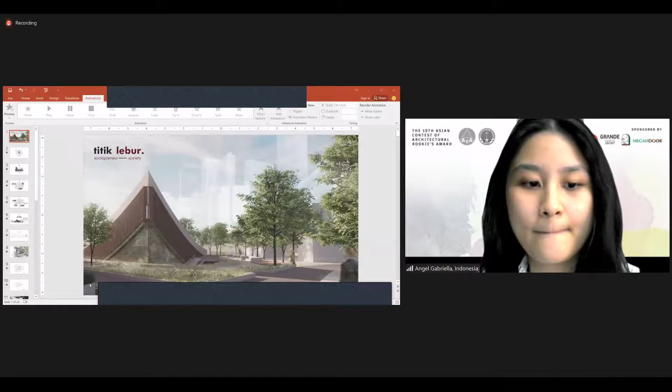Greetings everyone, I'm Angel Gabriella from Petra Christian University, Indonesia. Thank you for the opportunity to present my project, Titik Lebur. Titik Lebur has the closest meaning to unity or becoming one. The design brief was to make a symbolic youth center on Apsari Street, Surabaya.

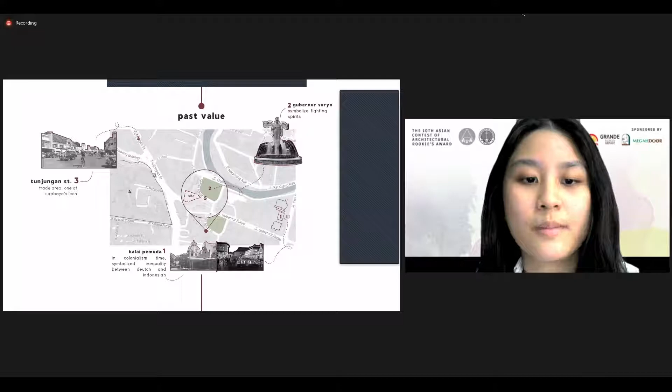The site is located in the center of Surabaya in the business district. Surabaya is known as the city of heroes with a lot of historical values. The design process started from issues and past values around the site. First, there is Balai Pemuda that used to symbolize inequality, and second, there is Apsari Park and the statue of Gubernur Suryo, which symbolizes the fighting spirits of Surabaya. Third is Tunjungan Street, one of Surabaya's icons as the oldest trade center.

Presently, small businesses like old street shops and street vendors around the site are beginning to be extinct due to the development of technology and modern shopping centers. Looking at how fast technologies have developed, the future of these small businesses are questioned. Not only that, but values such as egalitarianism and solidarity begin to fade and are replaced with individualism.

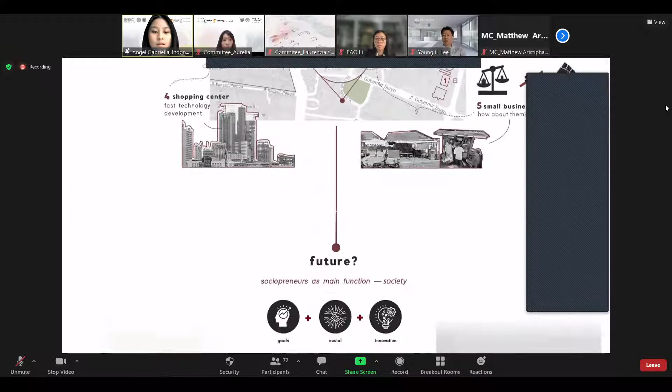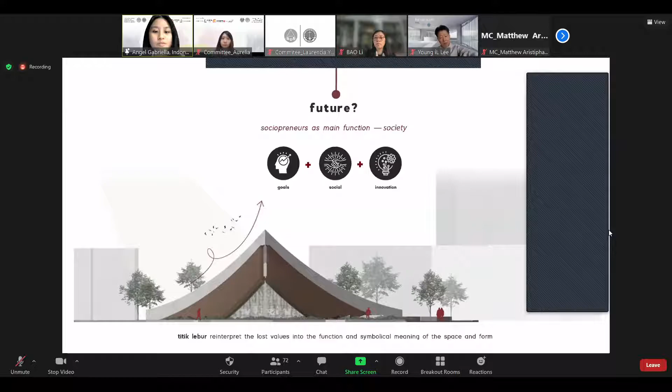That leads to social economy inequality. Therefore, Titik Lebur wants to empower youth to become sociopreneurs and connect them with society by reinterpreting lost values such as fighting spirits, unity, and equality into the symbolic meaning of the building.

Third, the ground is sunken to give a humble impression and blend the building with the surrounding. Fourth, subtraction is used to create skylight and outer space. And lastly, communal space for the street vendors is created to give linkage between the site and Taman Apsari.

The second entrance is through the back door, mostly used by sociopreneurs so they can go straight to their working space. There are also a lounge and outdoor area that are used for break time and create a social space.

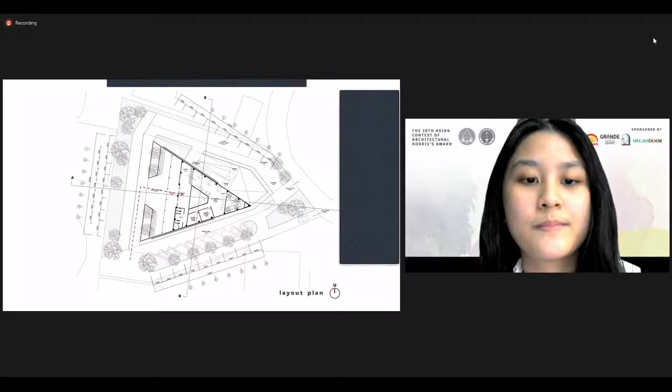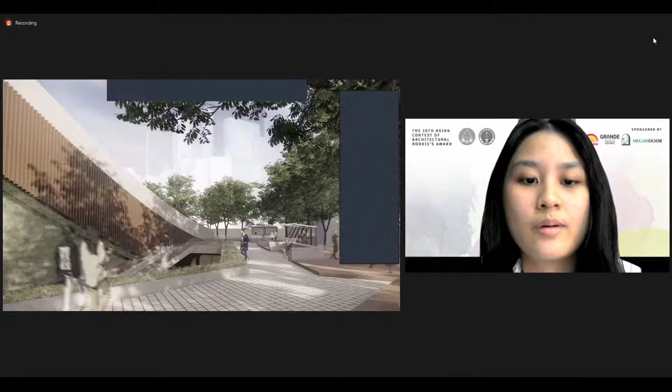Moving on to the vista, on entrance visitors are welcomed by the vista of Tunjungan Plaza as the building's background, symbolizing today's inequality, whereas the building represents the future, or equality. Before entering, visitors go through the ramp to give the impression of a long journey before reaching a goal. Murals on the side walls serve as a reminder of unity.

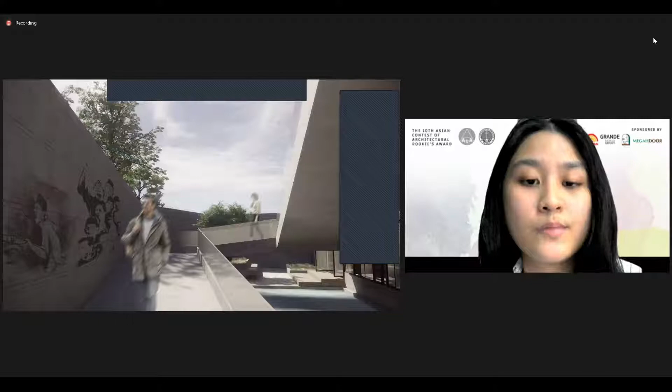The visitors then enter the amphitheater where sociopreneurs and small businesses work. The ceiling is made lower so it can create a more intimate feel and emphasize the space. The skylight above the amphitheater attracts people to look up.

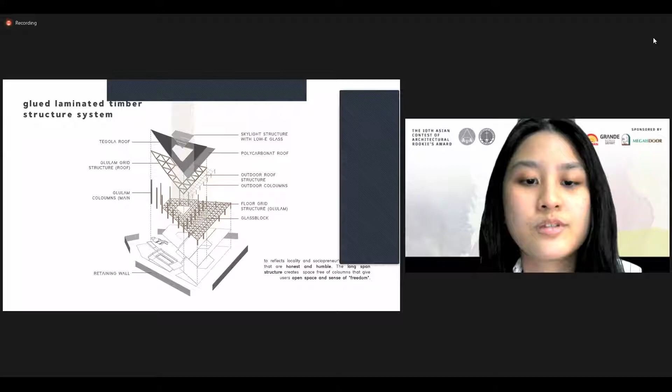The structure is made from glulam and is exposed to reflect locality and the sociopreneur's characteristic of being honest and humble. Open space is created through the structure and the minimum of walls so that it can increase social interaction. Low-E coating glass is used to give a transparent look and welcome users into the building.

Sliding glass allows natural ventilation, and vegetation is used to reduce the heat caused by the glass and blend the building with the outside. Timber shading is also used to emphasize the curvy shape.

This is the section. From section A, you can see the glass block and the skylight. And section B shows the response to collect rain and avoid flood, lowering the temperature in the basement.

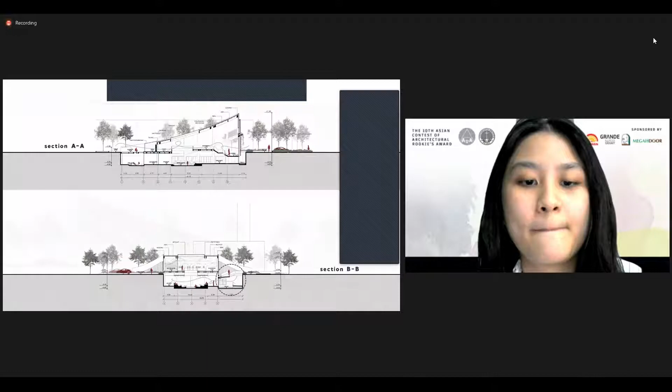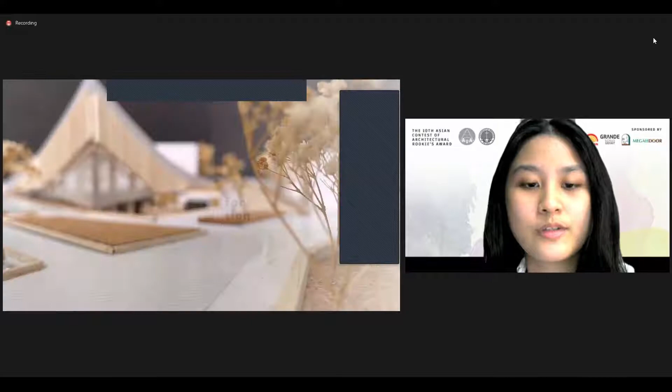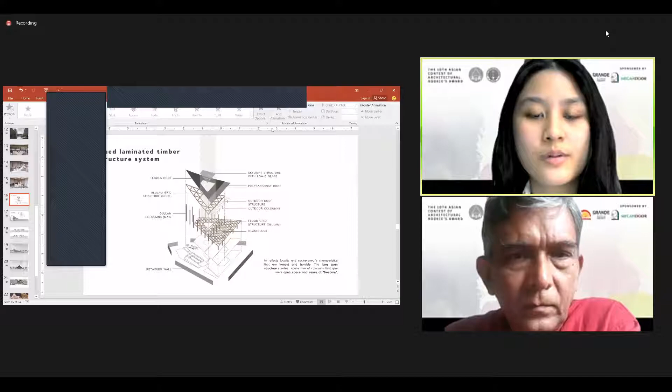Angel, can you explain the roof structure, please? The roof structure is made from glued laminated timber. I used a structural grid for the roof so it can give a long span structure, and also I used the floor with the structural grid to give a long span structure. So the space inside is more free, more open. With that, I want to create more social interaction between them.

So the same triangular grid is on the floor for the horizontal roof and horizontal floor. The structural grid is used for both the roof and the floor. So the basement is also an open plan without that much columns.

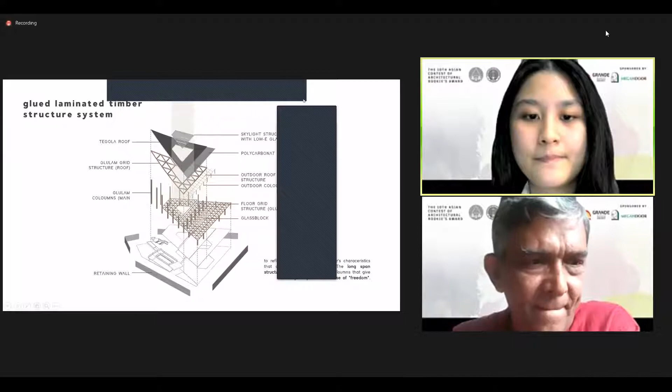Thank you for your presentation. I think it's architecturally well planned and the construction is very easy to understand, very simple. But like the other participants, you use the symmetry plan, very very strong and symbolic in the exterior view. We think that when you use symmetry, there will be another effect of the axis or centrality or something.

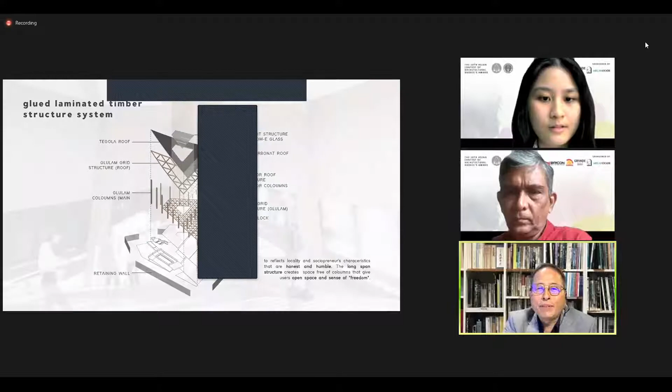So do you have any stronger intention to use this symmetry on your site? On your axis, is there anything on the axis, or is there a special meaning for your shape? Okay, wait a minute.

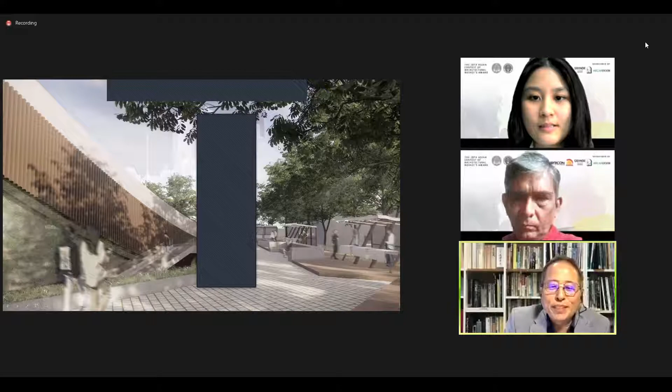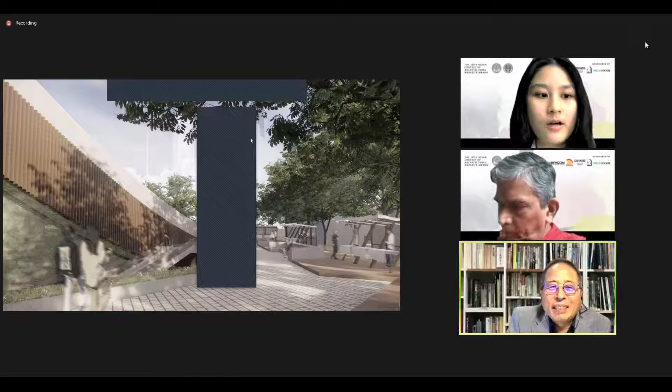So yeah, I want to create a vista towards that building. So buildings are for you an important factor in the central city. And how about the other side? Anything? Also, on the other side, there is the Taman Apsari, or Apsari Park.

This is the Apsari Park. There are usually a lot of youth who spend their time in the park. So I want the building to have an open impression from the park, so it can invite those youth to come to the building.

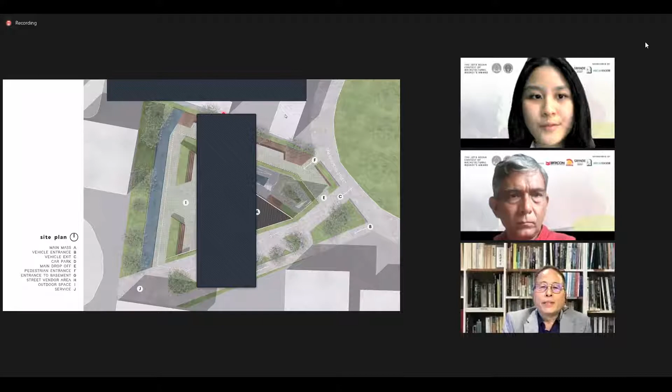I'm sorry for interrupting, Angel, but I think we see a black box in the middle of your presentation. I think it's your Zoom that's blocking it. Yes, oh I think it's better now. Better for the judges as well.

Yes, so this is the Apsari Park here, and the building is actually looking towards the park, so that it can invite people.

So we can see you have a good idea of fitting your building into the site form. But be a bit careful about using symmetry. Symmetry means a very strong effect to the outside. Okay, thank you.

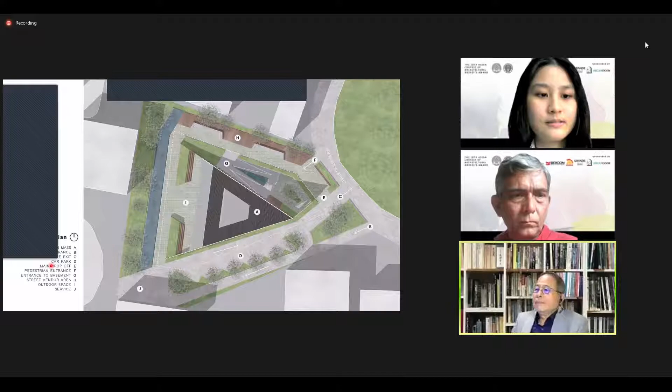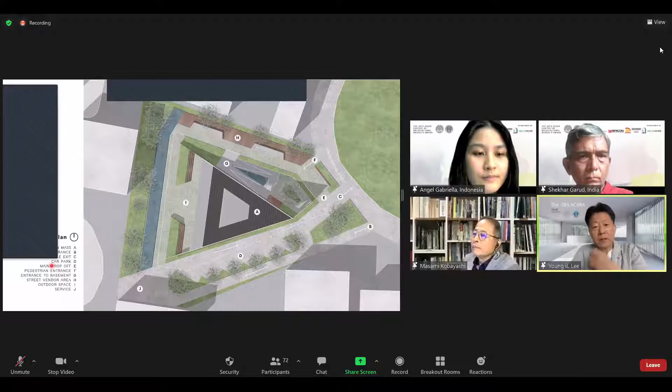My question is related to Professor Kobayashi. Looking at the assignment in your university, it is to make a symbolic youth center. So how did you understand the symbolic youth center, and how did you express it in your plan? Is it through symmetry?

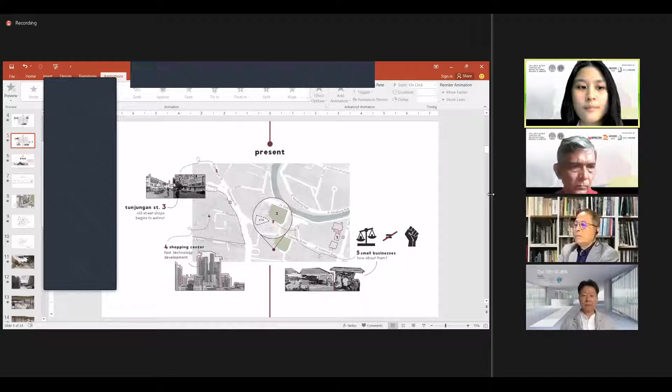For the symbolic meaning, I want to reinterpret the old values, the past values, such as this fighting spirit, and also this social inequality. I want to empower the youth to be more humble and to bring back those lost values into the building by making a symbolic building.

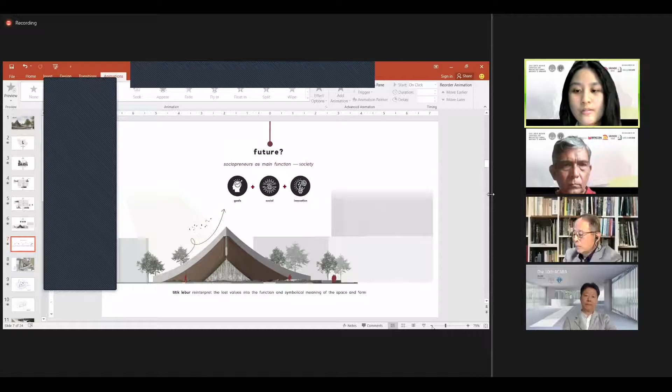So the first symbolic meaning is from the form. The form is made like an undulating form to create a meaning. In this form transformation, I explained a little bit about the symbolic meaning - the form actually makes a curved form and points to one point.

This is actually representing how a sociopreneur goes from zero to hero, and also to remind them how Surabaya used to fight colonialism. I also want to give this humble impression or feeling from the building, to remind them to always be humble, and to blend the society and the sociopreneurs.

Does that answer the question? Okay, okay.

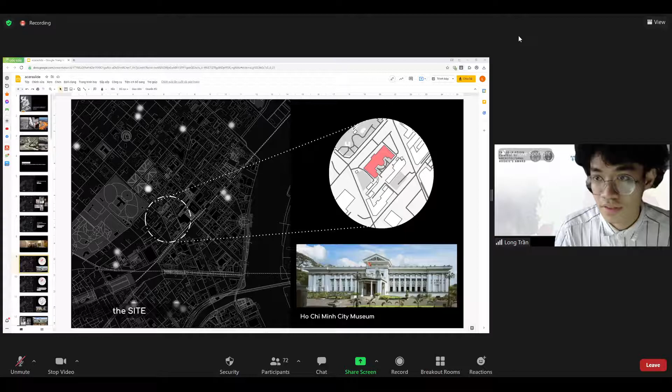All right, we can already see the screen. You can start the presentation. Hello everyone, do you hear me? Yes, yes, okay. My screen, is that normal? Okay.

Hello everyone, I'm Long Tran from Ho Chi Minh University of Architecture. You can call me Long, that means dragon in Vietnamese. Now let me start my presentation.

Saigon, 300 years ago, the flood built up the fertile land. The current brought ships from far away, from China, to explore and develop the land. So the currents created the typical traditions and culture of Saigon.

Could you zoom in a bit so we can see the full slide? There's parts cut off. I'm sorry. Seems some parts of your slides are cut off. I think just show, or you want to focus on some areas. Area. So go ahead.

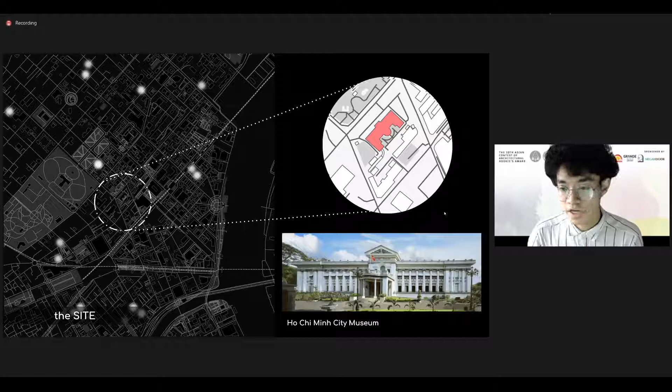I found that the Gia Long Palace of Old Saigon is also a city museum today, a place to display artifacts about the development history of Saigon. But the values of the previous era were barren, isolated, and found no common language with the young public.

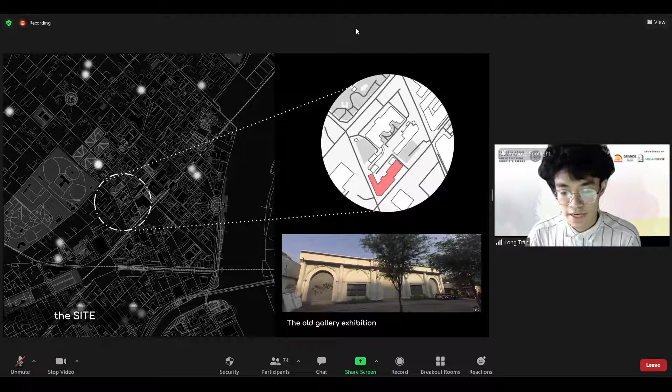Their campus was used as a city gallery, which did not meet the taste of young artists. So I have questions: could old and new values coexist in the same era?

My idea is to create a space in the city museum campus as a bridge between traditional and modern values. I realize inheritance is a sign of suitable development.

The first bridge of contemporary art, of new experimentation, is always placed next to the values of the previous era. They do not negate each other, but follow each other like the current. The stronger the connection, the stronger the currents become.

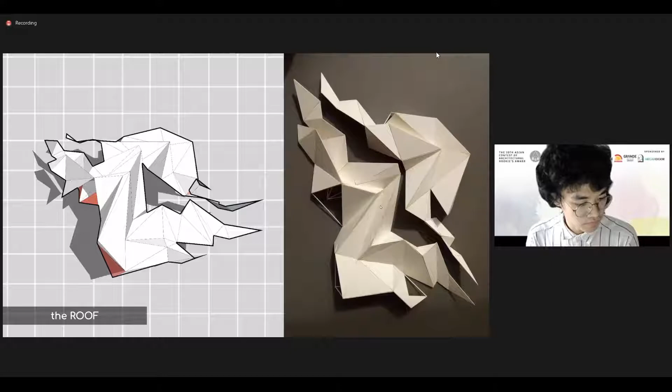Now we get to the roof. The two-layer roof design has minimized outside noise impact on the building. Besides, the roof layers fold up and down, overlapping each other, making the building still ensure the amount of natural light entering. Light received is mainly scattered light because it has passed through the roof layers, so light intensity and radiation are significantly reduced, especially in a country with significant sunshine like Vietnam.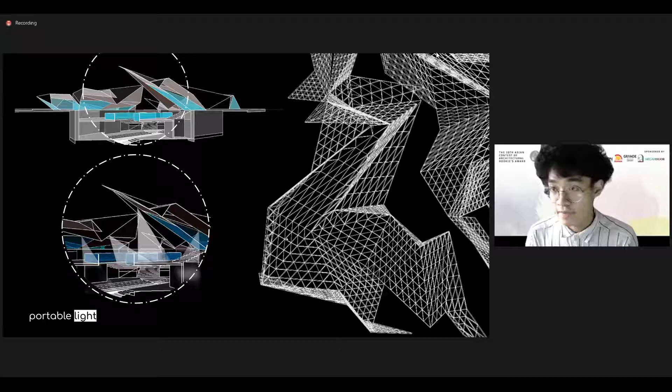I could change the interior roof finish to mirror, and we would have a mirror house. Then the roof of the building seems to disappear, leaving the work and the space its reflection. We can completely experiment and change the material depending on the idea and content of the work on display, so that the work can be included in the work itself, not just as background.

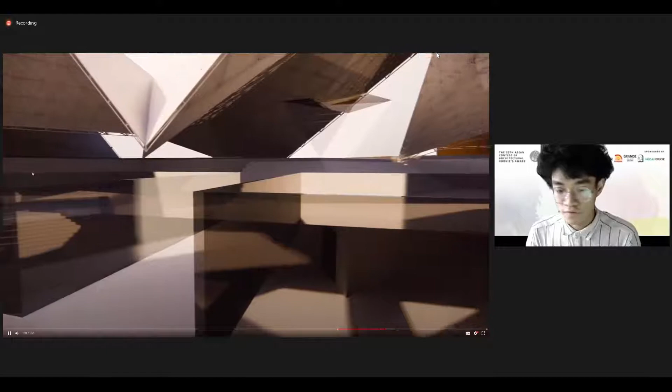Now we get to the B1 floor plan. The folded roof becomes a background for sculpture. The walls will be immersed in the undulating waves of the roof, sometimes hidden and present, changing continuously with the footsteps of the observer.

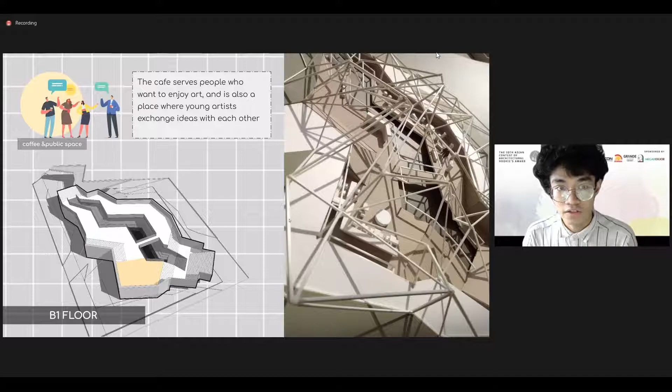So this is the entrance - a reception hall, the entrance to the building. The cafe serves people who want to enjoy art, and it is also a place where young artists exchange ideas with each other. The display is for visual art, like sculpture exhibitions. In some pictures, the space itself is a work of art.

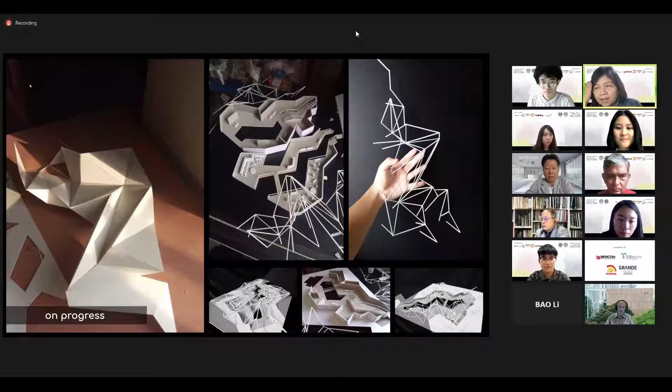Okay, thank you for your questions. Give me some minutes. Okay.

So it's a metaphor in your idea. Okay, do you have more questions for me? Yeah, the old values and the new values, how do I resolve that? I resolve that.

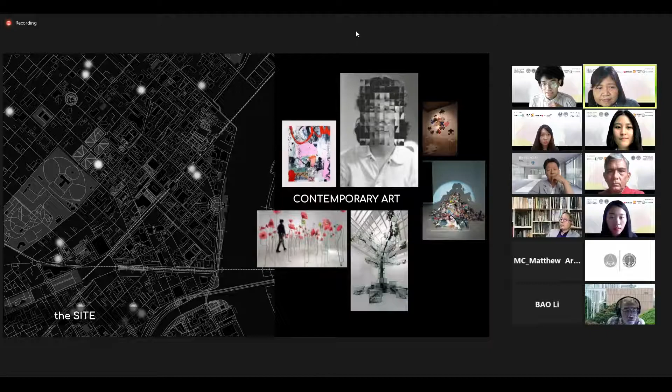My work is on the site of the museum. It's like a flow underground and on the site of the museum. So it attracts people more, to concern and trace about the old values like the museum. They can focus more on those old values when they come here.

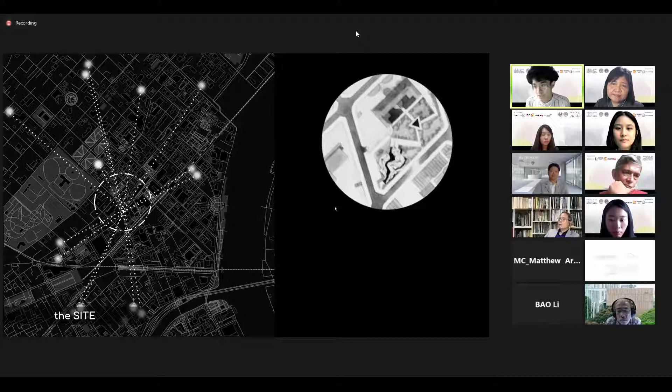So you made an infill design on the site of the museum. Yes. Okay so it is a kind of urban injection, like a landscape injection in front of the museum. So your design is the catalyst of the mix of old and new, is that what you mean? Yes, and most of that floor I make underground to respect the museum.

Okay. So the coexistence is between the design and the museum. Yes. Okay, thank you.

Could you please show, I think you have some more floor plans. We only saw the pencil drawing, but I think I've seen somewhere your presentation is a little difficult to follow because we always see fragments, I never see the full picture. Maybe that reflects you a little—very interesting, very beautiful, but it's like I always want to capture it and then it's gone, and then it moves.

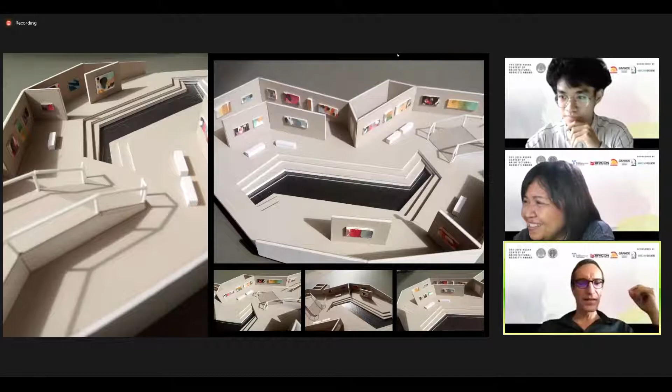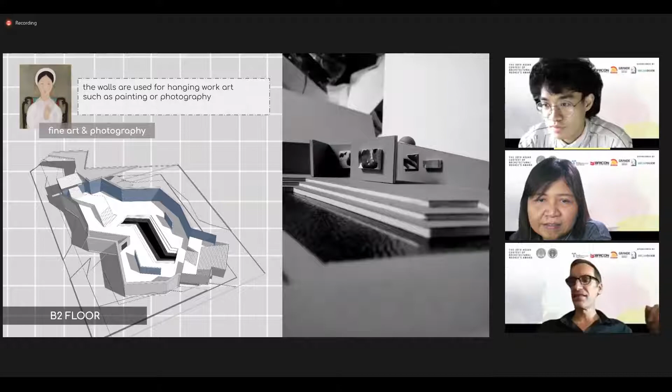But show me the floor plan, the floor plan you have somewhere. I saw it, the black drawn floor plans, 2D. The 2D plans, ground plan, no 3D, no sketch, just 2D, a real thing, 2-dimensional. The 2D ground plan, you have different levels I guess, but at least maybe just one, just the ground plan, floor plan.

That's B2 or B1. Wait a minute. Because it's important to see. I mean your total shape is very consistent, and I think it's nowadays already a traditional way to deal with heritage buildings, that you contrast with a totally different approach. You go underground, you go free shape, you don't try to compete at all.

So you're more like a piece of art sitting there in the park, or even digging into the park. I can understand that, but what I see here in this pencil drawing looks interesting, but you have somewhere on your board, I saw it, a proper floor plan of your whole exhibition. Can you show this? So that we see all the rooms you have in one, on the... no roof, floor plan.

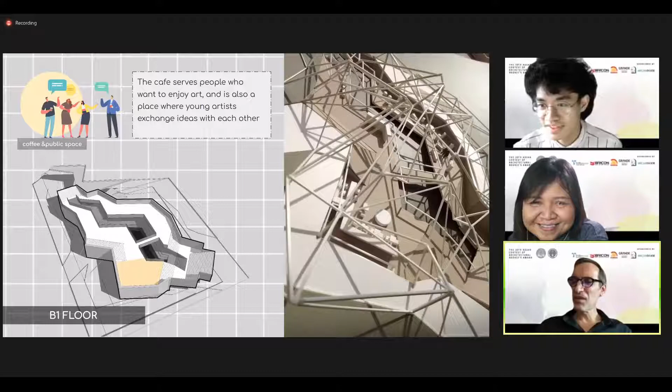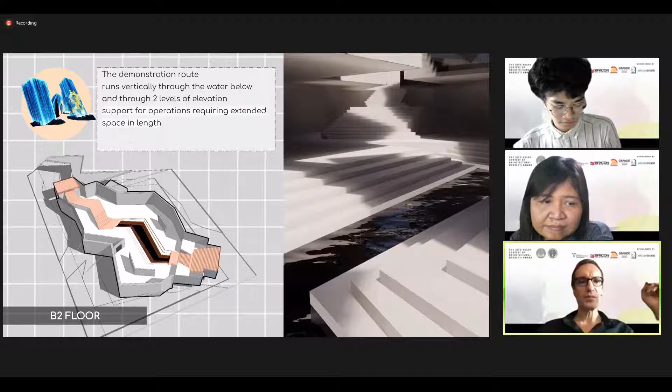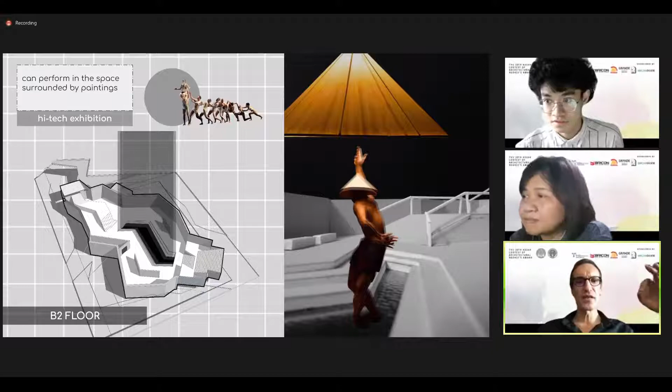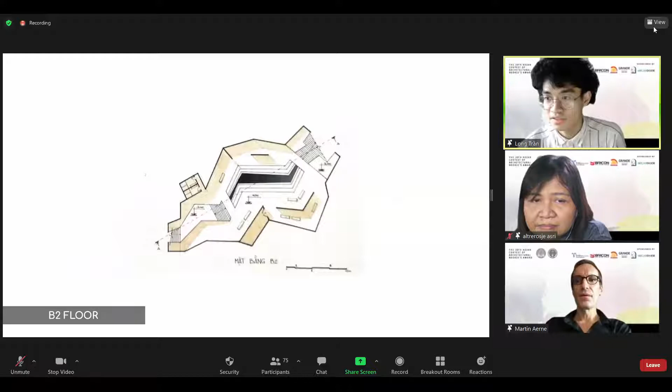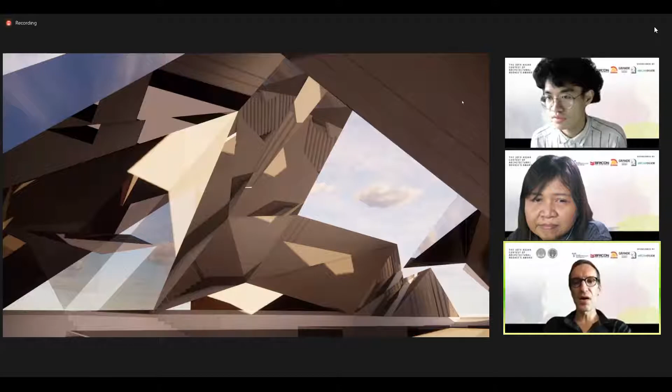I just have a plan for B2 floor and B1. Can you move it onto the screen so we see the full floor plan? I see here only a little part of it. The floor plan I have is my sketch, but not clearly drawn. I mean this is the master plan, the top view, that is good. Top view. But you have a floor plan on the ground of the whole exhibition. I saw it for a moment somewhere, but it comes in, it goes, and I never see the full picture.

But if you don't have it, then that's it. I think I can use my model to make you understand. No, not the model, just a floor plan, as we see. Again, your design is very consistent.

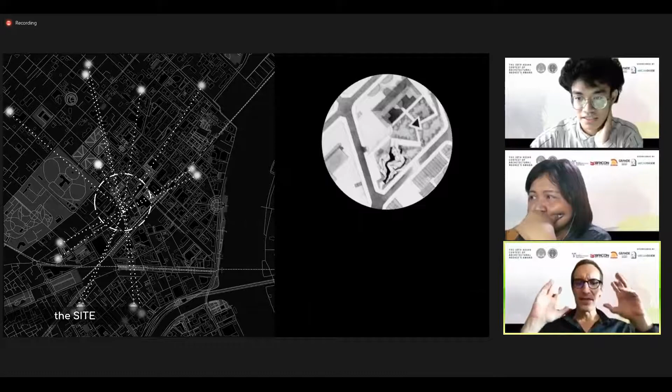You know what you want, and it flows through. But a floor plan would be important. That is the floor plan.

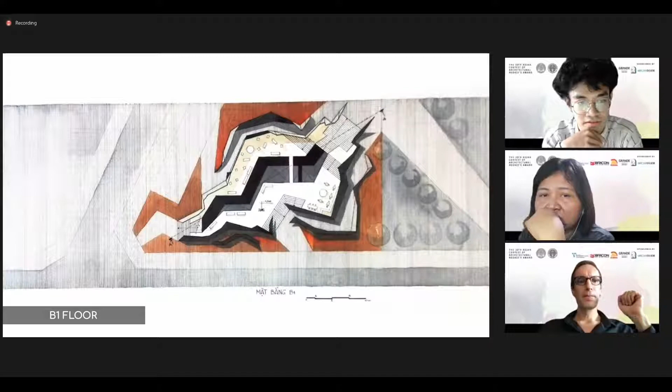It cut through the roof, so you can see something in there. Is this the one? Yes, but I only see part of it, the left side is cut off. I think there's a problem with your Zoom view because the committee can see the whole floor plan clearly. Oh okay, that seems to be the issue. Sorry for interrupting again. No, thank you for helping.

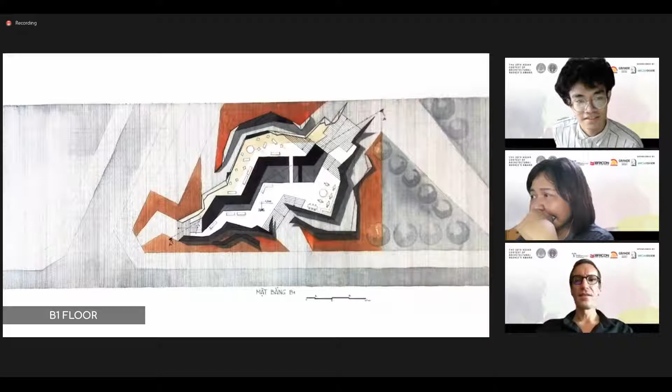I have a basic question. I didn't understand how you decided on the volume and their form. Imagine, in my way, maybe you adopted a form from the river shape.

That's not just the river. Okay, show me the slide of the Saigon River. My work can be shaped by the flow, the traffic. Yeah, okay, show me the slide of the Saigon River.

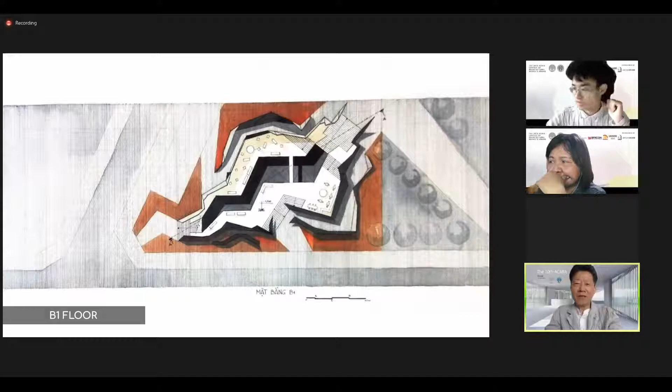Maybe. I don't understand how you decided the form, the roof form or something. The floor plan is also like a dragon, as in your name. I made the form based on pictures I saw of Saigon in the future and the past, so it gave me the feeling of a shape, my form.

So it's not just the rivers. Analyzing your work, I imagine, in my way, when you decided the volume and the form, you imagined two types of images. One is from the shape of the river, and the other is the Vietnamese alley, which is like a hand. So you mixed the alley and the river shape.

Is it right? Yes, but let me explain, it's not just the forms, it's also about the activity inside the building. It's not just the form, but we can understand what's happening inside. What kind of activities? All our activities are contemporary art, performing arts, and other activities.

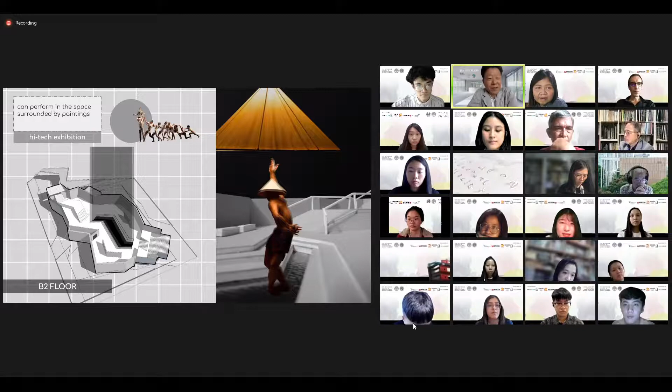Don't make excuses, it's your responsibility. But you can change and connect some space, it's not fixed, it's flexible. But I think it shows your creative sense of space. It is so nice, but the presentation is not good.

You know why? We didn't understand it perfectly. It was kind of hard to follow your presentation. I'm sorry. Okay, thank you, any more questions for me? It's always hard to follow the dragon, isn't it? Oh, thank you, yeah.

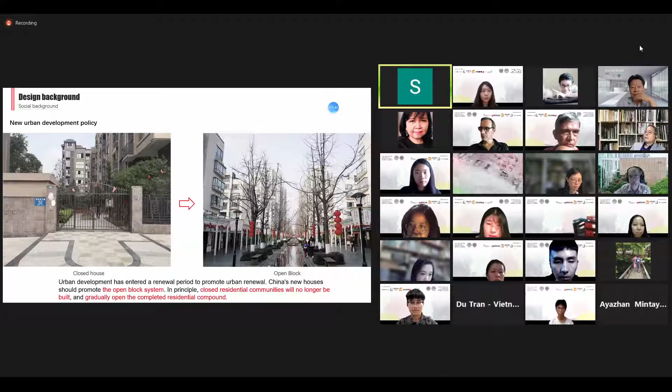At present, China is in a new stage of urban renewal and development. To promote this, we need to promote an open block system for communities. On the other hand, due to the 2020 epidemic outbreak, communities often use blue corrugated boards to achieve closure and isolation. This has become an effective means to deal with local epidemics, but it's not beautiful enough, and space utilization and efficiency are also low. Therefore, there is a contradiction between opening communities to activate the city and closing communities for isolation and prevention.

The site is located in Dingzigu Street, Hongqiao District, Tianjin, China. To its north is an urban trunk road and a university, and the other three sides face adjacent communities. Although there are many people and vehicles around the communities, the interior is still old and lacks vitality. Through investigation, I found several major problems. Question 1: how to change simple board isolation into a warmer material space with humanistic care?

Question 2: how should we update and enhance the old community to stimulate its vitality? Question 3: in the post-epidemic era, how should community public space adjust the opening and closing transformation so that the contradiction between community opening to activate the city and closing to isolate prevention can coexist harmoniously?

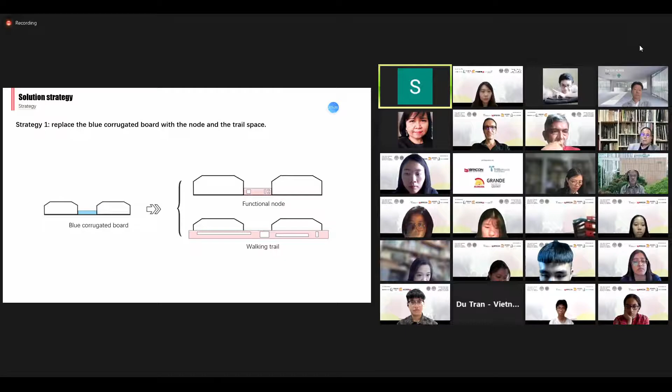Based on the above 3 questions, I propose 3 strategies to make an appropriate community opening and closing system. First, I replace the blue corrugated boards with the node and the trail space. Then I transform the internal vegetable market and other spaces, implant new functional buildings, and activate and improve each node. Finally, I use Chinese traditional garden techniques to improve the spiritual and functional attributes of the nodes and trails. Under the guidance of these 3 strategies, the block is generated.

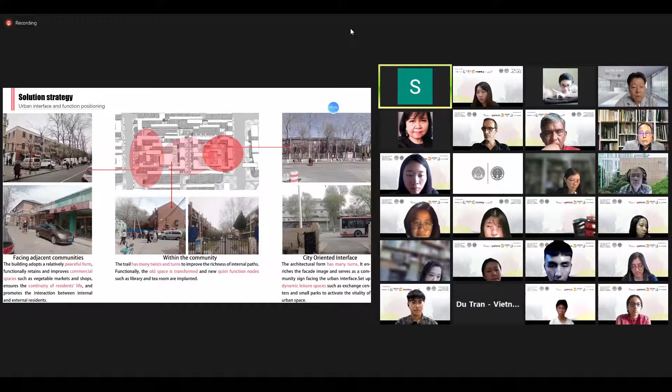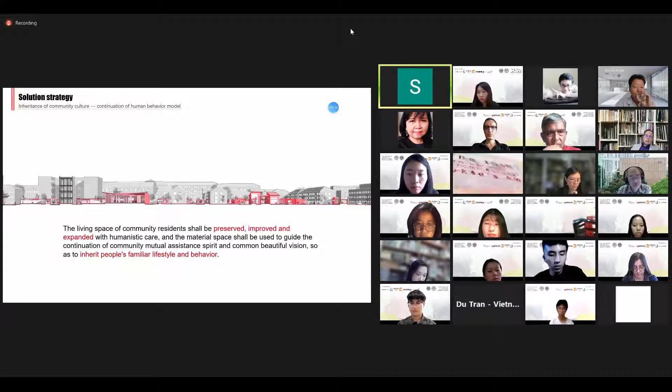Through investigation, the community is divided into 3 types of interfaces: internal community interface, surrounding community interface, and urban interface. Facing different interfaces, the architectural form transitions from peace to twists and turns, and the architectural function changes from quiet to dynamic and excitement, realizing response measures for different scheme, forms, and functions at different interfaces. This realizes humanistic care for the living space of community residents and inherits people's familiar lifestyle and behavior.

During the epidemic period, the nodes will be divided into 3 categories: traffic, prevention, and management. The mode transformation of community opening, semi-opening, and closing will be achieved through the adjustment of the opening and closing number of the 4 main entrance nodes.

The last part is a display of the scheme. First, we can see that the red part is the new addition and reconstruction part. The new scheme finally forms the overall scheme by combining the traffic system and the designing and transforming of the node and the trail.

The second part is a display of the explosion diagram and the local scheme. I echo the tortuous path of Chinese traditional gardens, promoting people to perceive nature and feel the open environmental atmosphere of the unity of heaven and man in a relatively closed space.

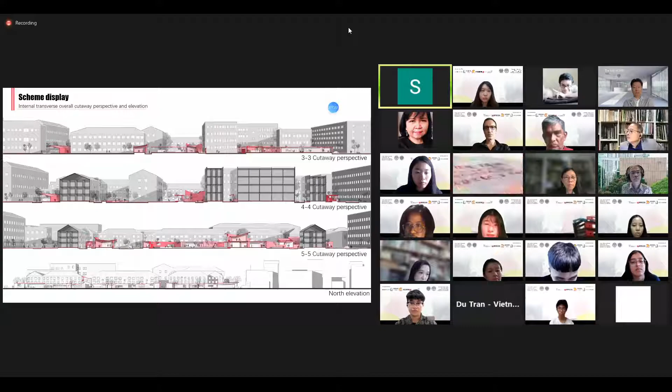The third is the plan and analysis of the scheme. I emphasized its relaxed spatial rhythm in the overall perspective and completed the high integration of man-made and nature, so that residents can feel the open and natural space atmosphere like Chinese gardens in the community.

The fourth is the conversion comparison of important node space between old and new. Compared with previous works, the entries improve functional diversity and space utilization, and realize the adjustment of community opening and closing degree by closing different numbers of entrances.

Transform the vegetable market into a community control center and supply materials point. The interaction center in the park has become an isolation point so that residents can quickly seek medical treatment in a familiar, green, and healthy environment. The last is the model display and the video display.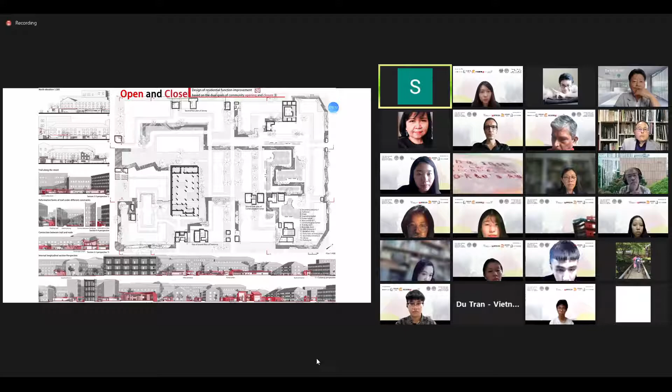All right, are you done, Yang Suli, with the presentation? Okay, what does it do?

That's my presentation. Thank you for listening. Okay, thank you very much. Now let's move on to the Q&A session.

Okay, Yang, right? Yang, see. Yes.

I can see you've done a good job here, and your presentation is very clear. You use traditional garden techniques to improve the functional attributes of nodes and trails. But when implementing the nodes and trail series, I think you should not only consider vehicle or pedestrian streamlines, but also think about bicycle streamline, which is a very important condition in the neighborhood. Also, don't forget what you want to connect: who are the real users in this community—the store owners, the residents, or the visitors—and there should be a timeline involved.

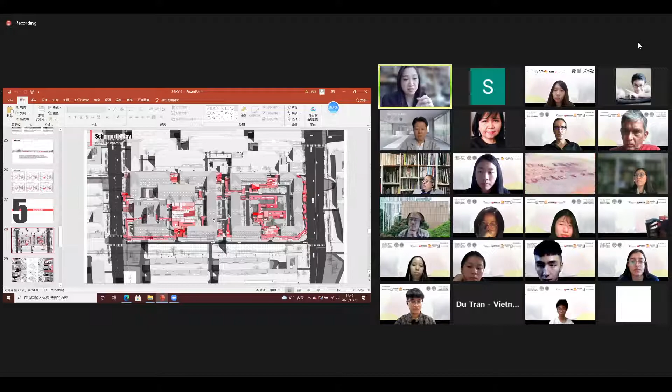For example, the conditions of your open and closed community proposal will be different in daytime and nighttime for sure. Also, during holiday seasons or weekdays and weekends, the opening and closing of the communities should not only adjust according to epidemic degrees, but could also be adjusted according to different times of the year, because the crowd conditions and the users will be different. So I think maybe you can share a little bit more about this.

Have you ever considered what would happen—like maybe during the weekend, the users might change to parents or lovers or different kinds of people coming into your community, more like tourists? What are you going to react to it, and how would this closing and opening community system respond? Please share your idea.

Actually, its circulation is flexible, and people rely on the twist and flexible architecture form, space, and path. Their circulation is also variable, and like you just mentioned, in different situations like day and night, people will—

Do you want to show me the plan or the slides when you're talking about this part? The slide? If you have a slide, you can go with it.

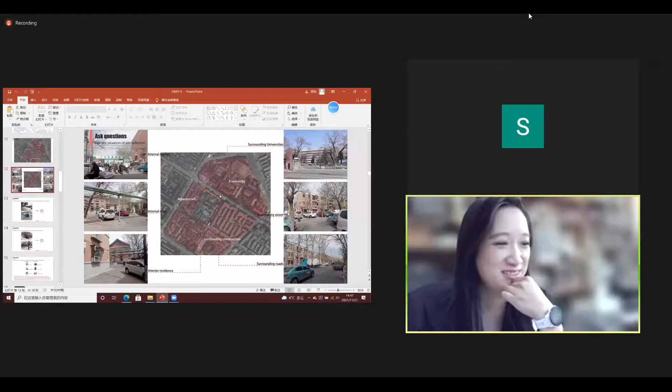Okay, thank you. I think maybe you can explain a little bit more about this flexibility of the space, open or close, during different times. I think you have such kind of drawing.

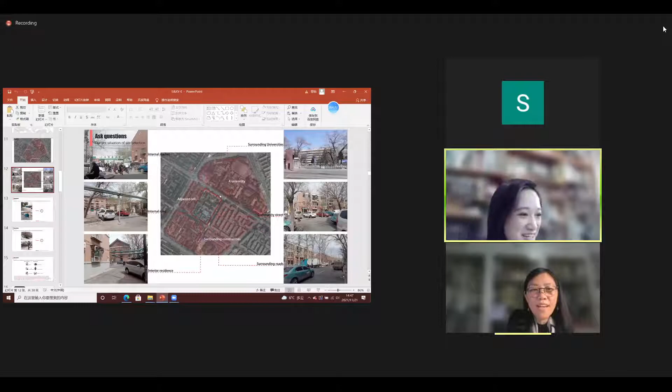That's my question. Show your slides. What's the flexibility of your design?

I think you have actually done a lot of work on that. When I see your panel, your boards, there are really quite a lot of drawings. Maybe you can explain not only this site plan, this master plan, but also some scenarios, some perspective, some isometric views. I think you have explained.

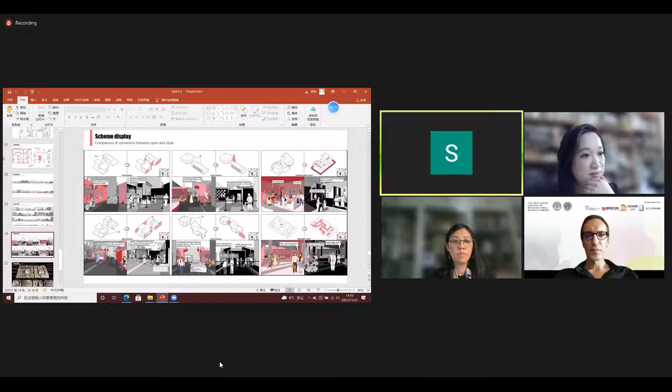I'm sorry, I don't really understand your question. I would like to see what is your design proposal - how does it look, either in 2D or 3D? Then we can verify all those intentions within the design, not as diagrams, but the real design.

It's about the block, the architectural form. Yes, I see that.

The architectural form is first located - show it. Don't just talk about it, because when we talk about flexible, in and out, we want to see what it is, and we need to be convinced that it is flexible, or that it's necessary to be flexible. Not everything needs to be, but right now we are talking about a lot of concepts, and I still need to see the evidence of the final reality of when things are implemented according to your design.

The flexibility is first in its form - it twists and turns like this, and this twisting and turning is dependent on the restriction of the original greening and the layout of the community.

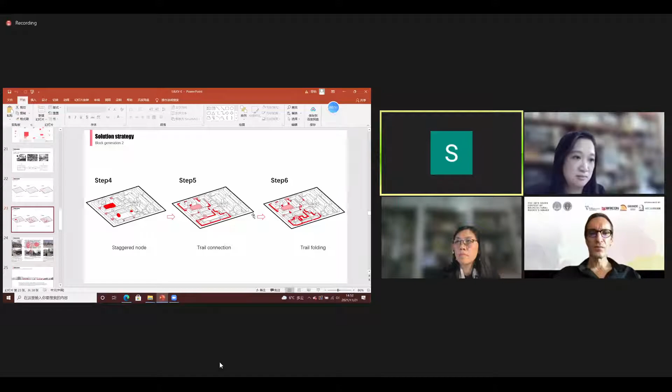And I wish that when facing different interfaces, the architectural form and function will be changed, such as when within this community interface, the architectural function will be commercial and its form will be different.

When facing the adjacent communities, its function will be like a library and other places where we can do activities. Facing the urban interface, the architectural form will have more turns and twists and some dynamic excitement. I think that's the place where the architecture is flexible and can be changeable.

It's still rather abstract to me. If you go to the end of your slides, you probably show how it will really look if done according to your ideas—the design of your intervention, not just explaining the concept, but how your design actually looks. I'm not saying it must be just a building, it can be a mix of how you treat an outdoor space, regulate access, change surfaces, or restrict movement, but I still have not seen a design.

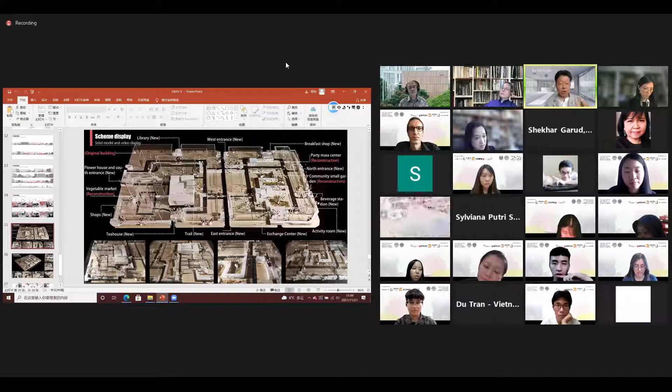Yeah, this one. So, how is it? Did you ask me how to do this—did it spread over the wide area?

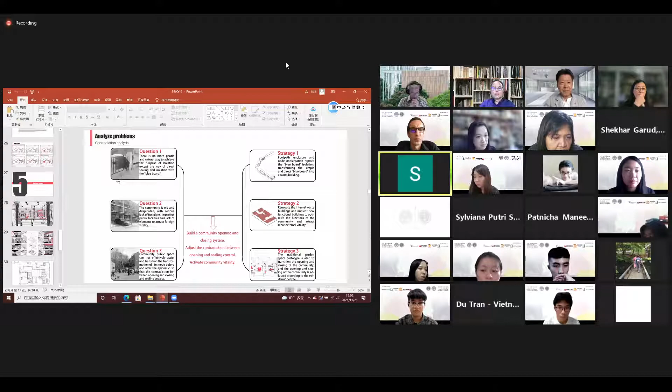Now, you said 200 people are living there, and the opening and closing system is for these 200 people, okay? Only 200? Not more? Because it's an old community and just some old people live here.

Yeah, if so, can you spread it wider? Why did I choose this site—is that the question? Are you asking me the reason I chose this site? No, listen: can your opening and closing system be spread over a wider area, for example for 2,000 people?

This is just a system for one community, but if another place wishes to have a space like this, I think each community can have its own system. Also, this system's function and form are changeable depending on the interface it faces, so when applied to other communities, it can change its form and functions and be widely used elsewhere. Okay, if so, here's my last question: why did you limit it to 200 people?

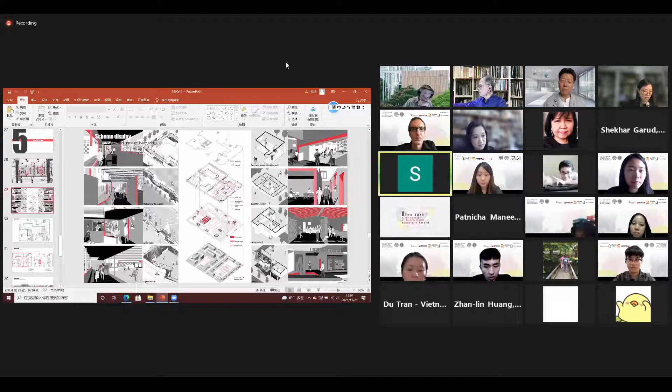First, this is an old community where equipment and measures for epidemic prevention are in short supply and backward, like the blue garbage boards. Compared with newly built and modern communities, I think it has an urgent need for change, so I chose this old community.

This old community also has history, having been built several decades ago, and its residential architecture has a distinct technical style. The roofs have their own characteristics, so it's both typical and common.